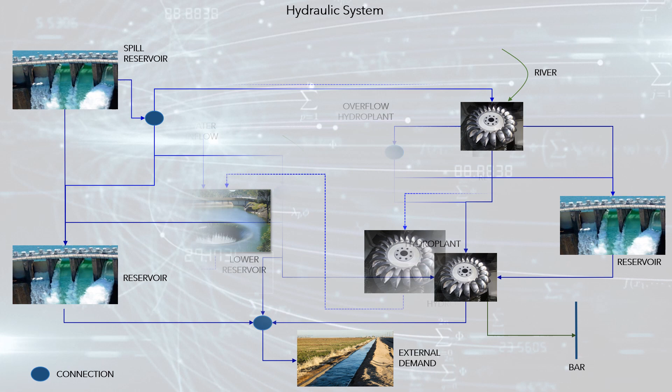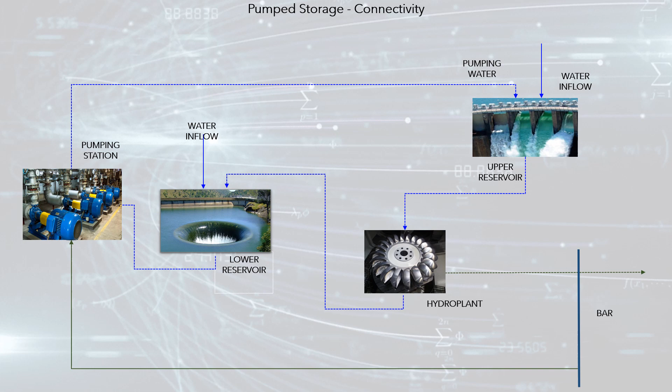Hydroelectric power plants are modeled independently of reservoirs, so plant-reservoir connectivity must be established. The regulation capacity of the reservoir is simulated in detail, so such a simulation consistently represents the dispatch of the power plants, considering their ability to regulate the multi-annual, annual, and hourly water resource.

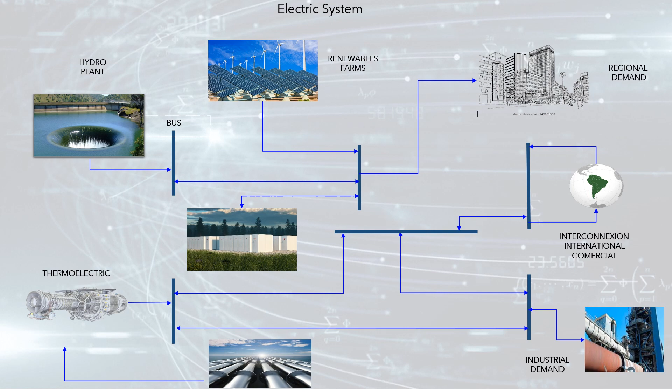Electric system physical modeling. Electrical connectivity is carried out through a network of circuits and bars that integrates different types of installations: power plants, like hydroelectric, thermoelectric, coal, wind, solar, biomass; places of demand, like industrial, cities; regional interconnections and energy storages. High power includes the simulation of several types of renewable energy sources and energy storages. For each type of electrical asset, high power includes the exact equations for simulation.

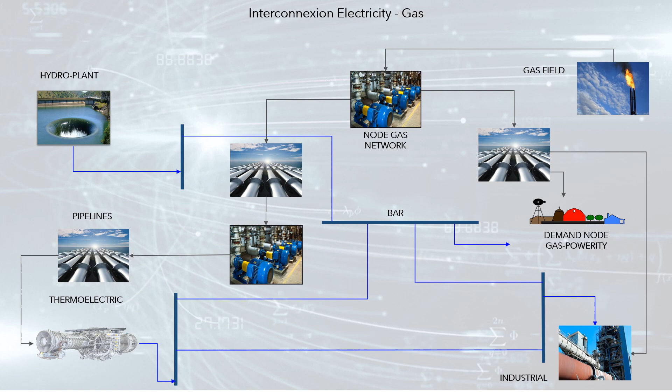Natural gas system physical modeling. High gas describes the process of supply and demand of natural gas. From this point of view, its integration with the electricity system determines the economic equilibrium of electricity-gas markets. The entities of the natural gas system are: nodes, which connect the gas system installations. Production fields. Consumption zones, discriminated by sector, for example, refineries, heavy industries, residential, vehicular, commercial, and thermoelectric power plants.

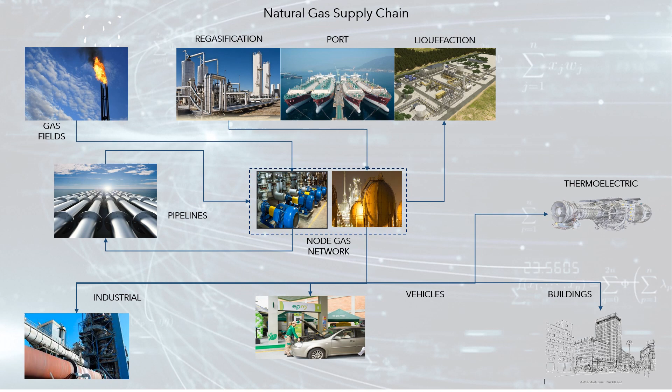Transport systems: I, pipelines, and II, multimodal transport systems using vehicles; pumping stations, which compress the gas to transport it; and ports, which receive and ship liquefied natural gas, LNG, and have gas storage capacity. Connectivity between the electricity and gas sectors occurs through the demand for natural gas for use in thermal plants, and the substitution of demand that can occur between gas and electricity.

Electricity system and wholesale market mathematical models make up a flexible decision support system that provides different types of services in an integral way. They can be classified into integrated dispatch of generation plants, optimization of generating agents, and predictive analytics of stochastic processes. Traditionally, the optimization models in the electricity sector consider individual modeling with exogenous coordination between models, based on multi-stage stochastic programming, and using large-scale optimization methodologies.

The differences with the state-of-the-art modeling provided by high power are integrated holistic modeling, scientific risk modeling, multidimensional uncertainty, parallel optimization, and autonomous real-time distributed optimization.

Three types of connectivity of the generation system and the transmission power grid are considered. Ideal single node: ideal dispatch ignoring the transmission system. Electric transmission network connectivity: based on the detailed connectivity of the electricity transmission system using bars and circuits.

Operative areas connectivity: when the user does not have, or does not want to use, the detailed configuration of the electricity transmission grid, it is possible to use the connectivity based on operational areas, including limits on the transfers between areas.

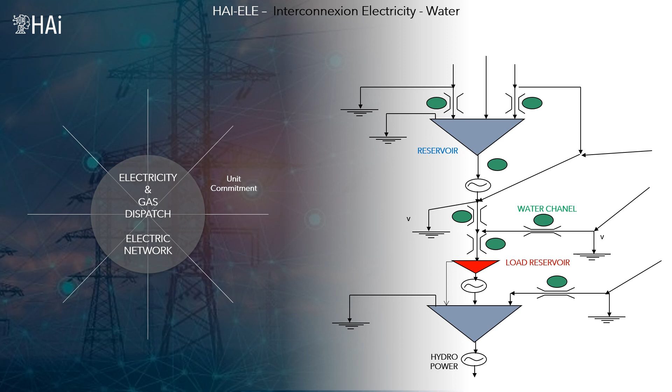Interconnection electricity-gas integrates the electricity network with the natural gas network. Interconnection of electricity and water can be fully detailed, including travel times between nodes and transport restrictions in water resource conduction channels. The central model of high power is the standard representation of the electricity and gas supply chains. These equations give rise to variations of the model according to the techno-economic concepts that support a specific modeling.

There are at least 4 types of economic models to represent the electricity and gas market: economic efficient dispatch, EED; economic regulated dispatch, ERD; Nash-Cournot equilibrium dispatch, NCD; and unit commitment, UC. The EED is the core model of high power, as its equations and constraints are used in multiple specific models that the agent requires to address decision support needs.

The EED and the UC models optimize the dispatch of generation infrastructure, minimizing the cost of operating the electricity system, which simulates a perfect electricity market. The differences between these two models are the detail of modeling. EED is oriented to planning and UC to real dispatch.

Economic regulated dispatch: dispatch of plants that minimizes the cost of operation of the interconnected system and includes representative aspects of the regulation of the electricity market being simulated. It does not correspond to a model of economic equilibrium; however, it is an easy and fast way to represent regulatory considerations based on optimization models.

Nash-Cournot equilibrium: dispatch of plants oriented to the simulation of competitive electricity markets with agents that can influence with their decisions on transactions occurring in the market. It can be used to, among others, project the dispatch of a competitive market and study the exercise of dominant market power of agents.

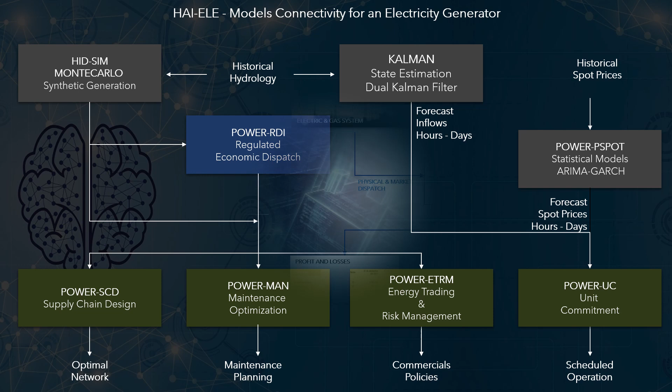4 models are considered fundamental to support the strategic, tactical and operational decisions of an agent that operates generation plants. The diagram presents the design of an integrated set of mathematical models to support the decision-making of a generator agent.

Electricity dispatch and financial analysis: integration of dispatch models with asset liability management, ALM, financial models including risk management, to perform analysis of the financial impact of decisions. The main applications are the valuation of income and expenses of investment projects, energy installations, and valuation of energy companies, and integrated optimization of investments by global energy companies, taking as a reference the regulatory laws of the different regions or countries.

The financial modeling results individualize the operating income and expenses, and can include all types of legal accounts. Electricity supply chain design and risk management, associated with strategic planning decisions related to resilient design of the supply chain, in relation to capacity of reservoirs, transfers, power plants and other assets of an electrical system. It may include risk management and financial planning.

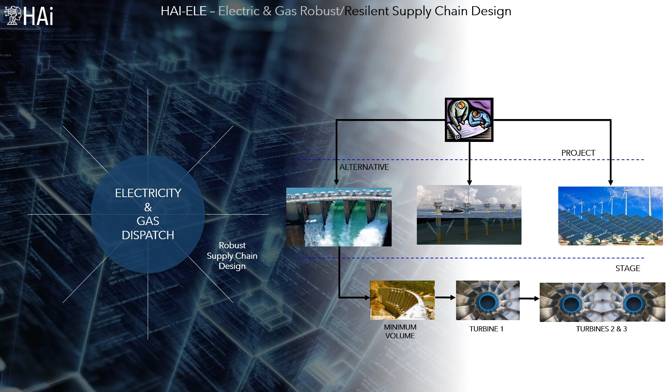Energy trading and risk management: optimal decisions related to trading energy and coverage of financial risks based on standardized or non-standardized bilateral contracts. It corresponds to a set of mathematical models aimed at supporting the decisions of the different agents involved in energy trading in the long-term market, spot market, and secondary markets.

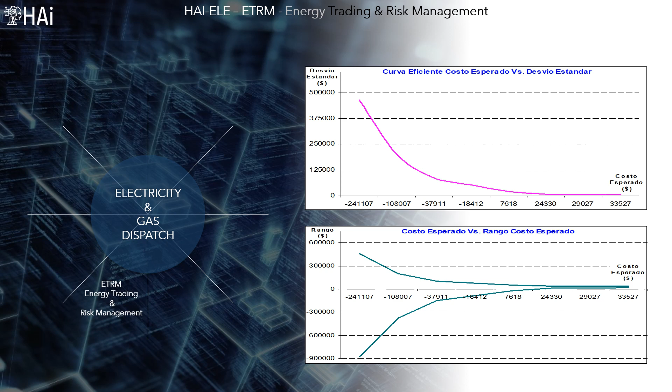The result of a risk analysis is the definition of Pareto curves of risk versus expected cost, based on which the decision maker must define the risk position he wishes to assume, varying between risk-prone and risk-averse.

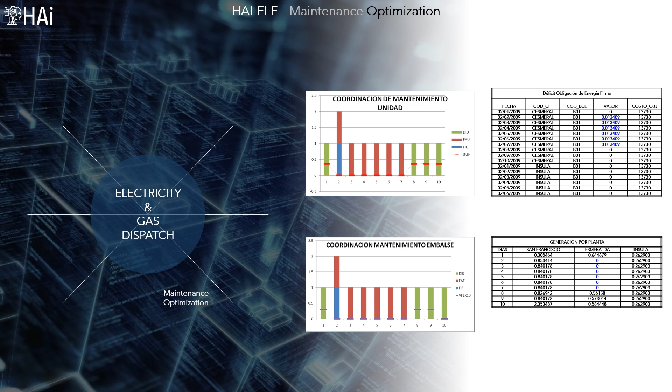Maintenance optimization is oriented to policy making for preventive maintenance of multiple central generation plants and other electrical assets. It can be applied to all assets in a regional or national grid. High power can be implemented following the principles of PHM, prognostics health management, for industrial asset maintenance, integrating specific models of predictive analytics for asset components and prescriptive analytics to optimize the integrated operation of the asset network.

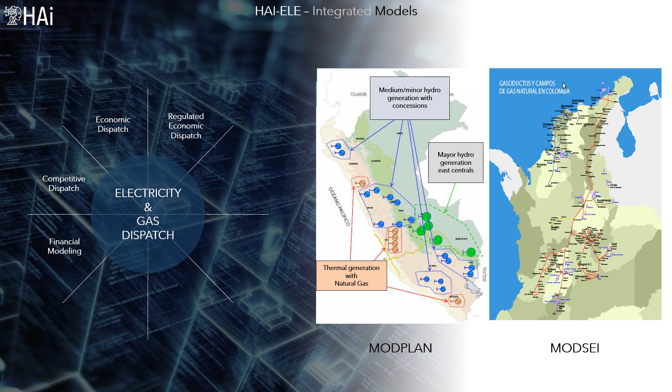High power has been used by the ISO in Peru and the Market Supervisor in Colombia for planning and decision-making purposes. High power includes some predictive analytics models.

Spot price modeling. The prediction of spot prices of the energy market is fundamental for the decisions made by an agent that participates in that market, whether buyer or seller, generator, trader, or distributor of energy. This is because the decision maker requires that the model's results that produce spot prices be used in other mathematical prescriptive models.

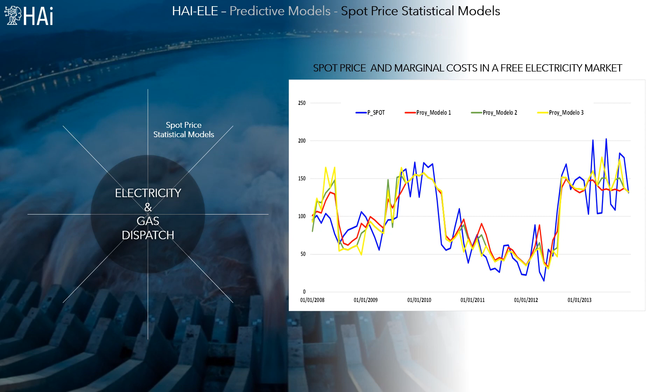The mathematical models to be used depend on the planning period, short, medium or long term, and the type of market considering the dispatch of the plants, by mathematical model, or by market agents' offers in a free market. In free markets the situation is complex since the law of price formation cannot always be explained based on mathematical rules, explicit, clear and universal, that may integrate a mathematical model.

Synthetic generation of renewable energy sources. For the generation of synthetic scenarios of climate variables, there are two requirements: short-term, hours, days, and medium/long-term, weeks, months. Specific short-term models must be built for each renewable source. For the medium and long-term, there are three alternatives to generate synthetic scenarios.

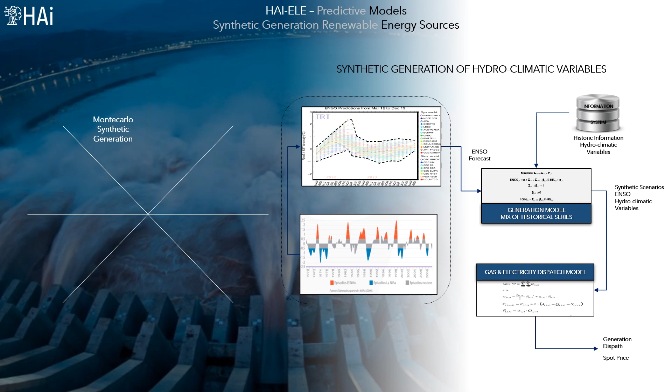Synthetic statistical model for the generation of climatic variables, Fiering-Matalas type. Generate synthetic series of climatic variables based on the mixture of historical series. Generate synthetic series based on the historical series having the ENSO series, El Niño Southern Oscillation, as an instrumental variable. Projected short-term hydrological contributions using variations and enhancements of Kalman filter.

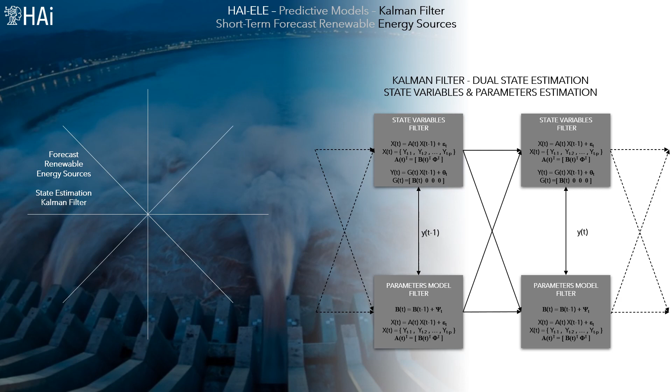Smart grids optimization models. In a regulated environment, generation, transmission, and distribution are operated by a vertically integrated enterprise, usually state-owned, which has a monopoly on the supply of electricity. Conversely, in a deregulated environment, different parts of the electricity grid are owned and operated by different actors, and electricity markets provide a platform that fosters competition among participants.

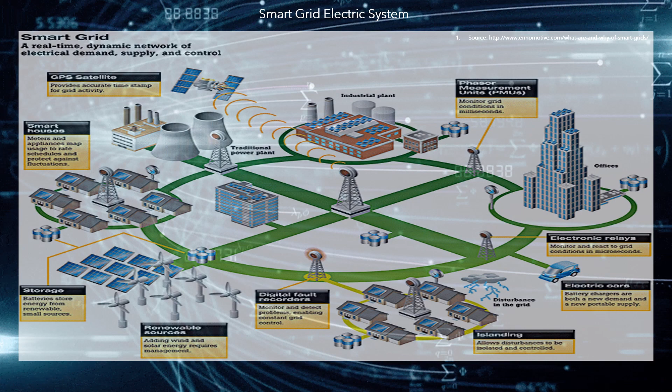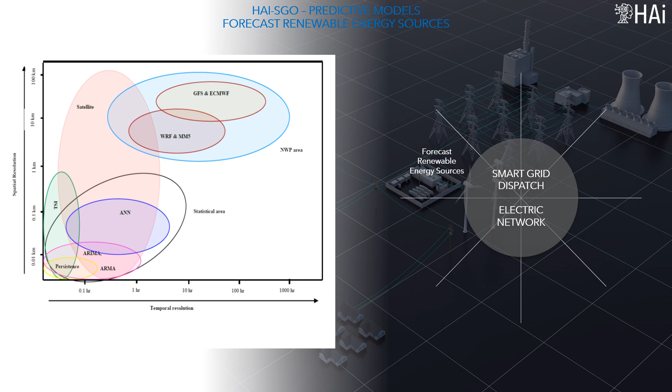As each smart grid is, it requires a specific decision support system that allows the operator to interact with the entire electrical system. HAI-SGO provides all the analytical elements necessary to configure the specific DSS that each case requires. Forecast renewable energy sources. They correspond to predictive analytics models focused on the prediction in the specific sites where the generation plants are located. Forecast of energy demand. Demand projections per years, months, weeks, days, hours.

HAI-SGO is integrated by the following optimization models. Economic dispatch of the smart grid, optimization of the management of electrical energy in small cities, factories, universities, shopping centers, office buildings, urbanizations. Smart grid unit commitment, optimization of the dispatch of the electrical load in real time, or in the short term.

Smart grid configuration, optimizing the network topology. It considers voltage control, configuration of feeders, location or activation or reallocation of electrical assets, like transformers, capacitors, and phase balancing. Smart grid design, optimization of the design or redesign of smart grids with modern power technologies. ETRM, electricity trading and risk management, decisions to buy and/or sell electricity, in a long, medium and short-term market, one day in advance or the day of dispatch.

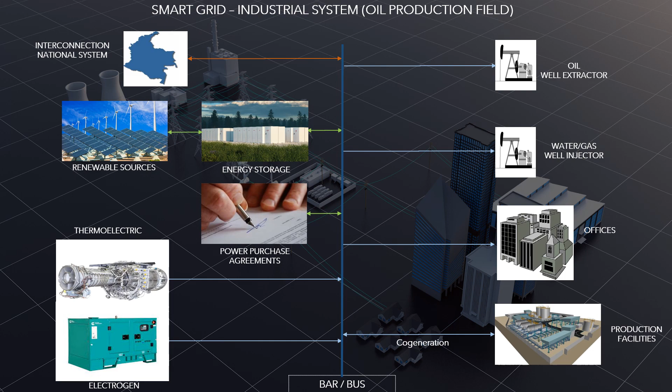Industrial energy efficiency. The technical economic viability of energy storage coupled with the proliferation of energy technologies based on renewable energy sources has changed the landscape of the industrial sector, since it is now possible, and increasingly efficient, to generate renewable energy and store it for use in due time. In practice, all industrial companies can be agents that interact in the electricity market, acting as co-generators and carry out commercial activities and transactions. This, together with the industrial Internet of Things, increases the pathways to achieve industrial energy efficiency.

Industrial energy efficiency results from the integration of production processes, transformation of matter, with industrial energy services, energy transformation, aimed at the simultaneous optimization of both industrial production and energy conversion that is related to polluting emissions of gases and liquids, associated with increasingly demanding environmental control laws.

The HAI-ELE and HAI-SGO models can be integrated with complex industrial process models, in which it is necessary to redesign the power supply system according to the new power technologies. This type of model includes the simulation of polluting processes, for example, combustion in furnaces, to determine the optimal mixture of fuels in accordance with environmental regulations. HAI-ELE and HAI-SGO integrate the models and information systems around a common data model.

Like Herbert Simon, hypothalamus artificial intelligence believes that computer-based mathematical modeling is the greatest invention of all times.